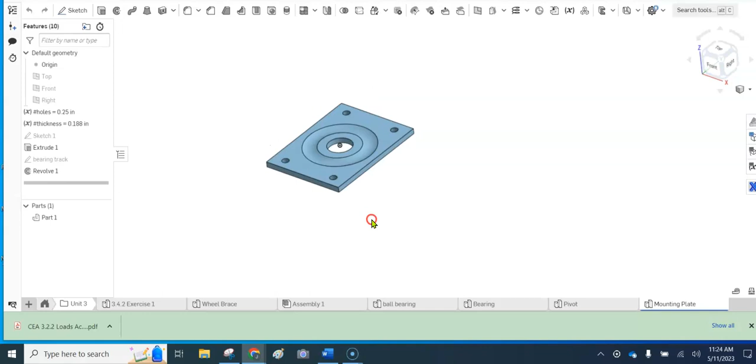Taking a look here, I've got a rectangular prism with a hole, 5 holes, and this circular groove in it. Most of this is pretty straightforward.

I'm going to create a rectangle, we'll use our corner rectangle, 3 by 4.

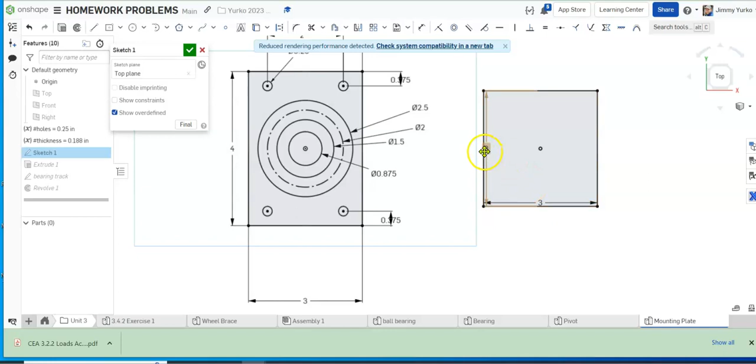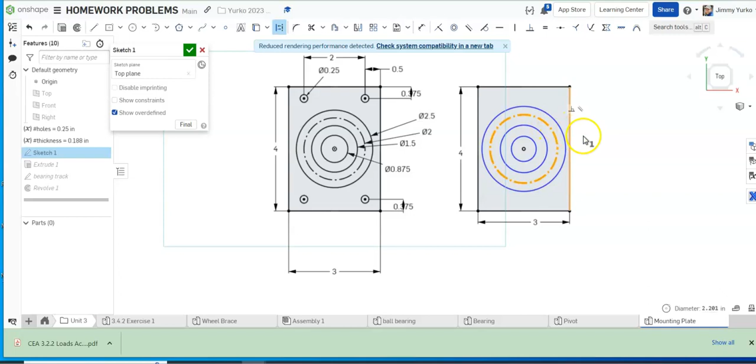And then we will create a couple of circles. It has 1, 2, 3, 4, with the third circle being a construction line. So the circle there is a construction line. Q on the keyboard gets you the shortcut to construction lines.

The circles are 0.875, 1.5 inches in diameter, 2 inches - that number is going to be useful later - and the last one is 2.5. Okay, we have 4 circles.

They are on the outside. Get those to line up. Make sure those center points line up with each other. We get this last one - I'll make sure that it lines up with both circle 1 and circle 3.

And then we'll set them all to be the same size. The dimension of those was 1/4 inch.

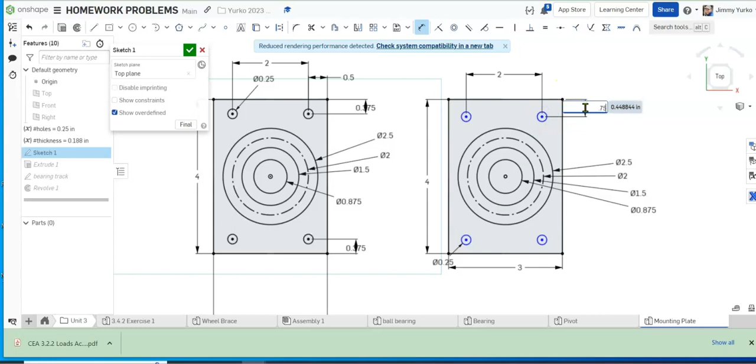Okay, they're 2 inches apart in this direction, 3/4 of an inch from each end, and a 1/2 inch from the side. Do your best to get those dimensions nice and neat.

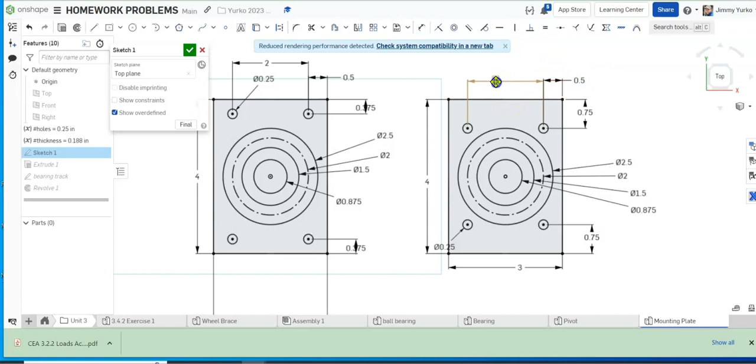Once you have all that sketched out, ready to go, it's time for extrusion. Turn the sketch back on. Make sure to include everything but the center. There we go.

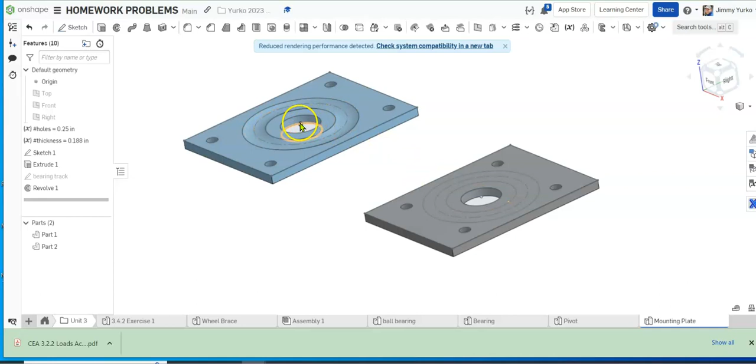Now I have my sketch turned back on, and we're going to go ahead and create this groove here. To do that, I need a plane. Now, if you created this from the origin like I did on my original, you're not going to need to create a separate plane - you just use the right plane. But I didn't, I'm duplicating this, so you have to create a plane.

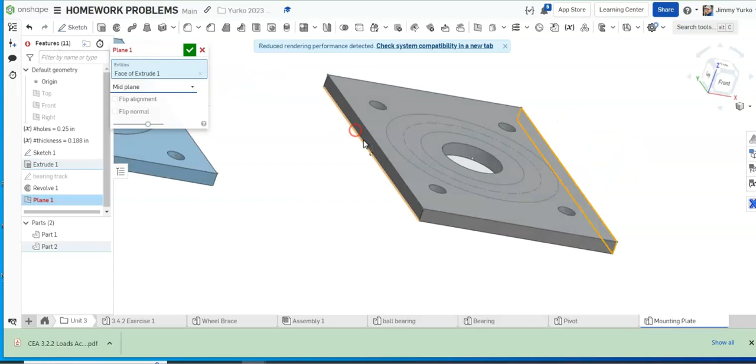Offset, actually mid-plane. Let's use mid-plane, so we use that plane and that plane. That creates a plane in the middle between those two faces. And so I'm going to hide my first part so it's out of my way.

And we're going to go ahead and add a sketch to that plane. Okay, again, if you did this from the origin, you don't need to create the plane, you just create the sketch on your right plane.

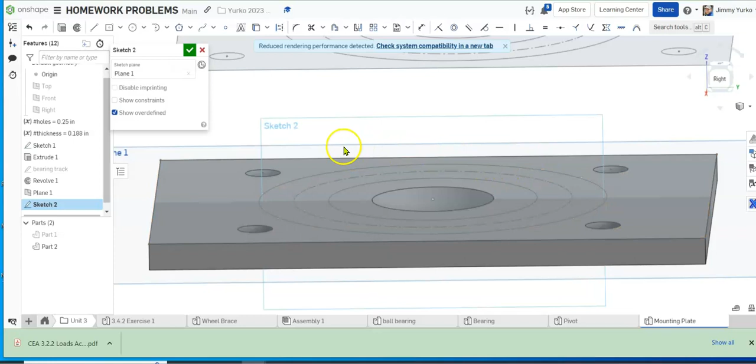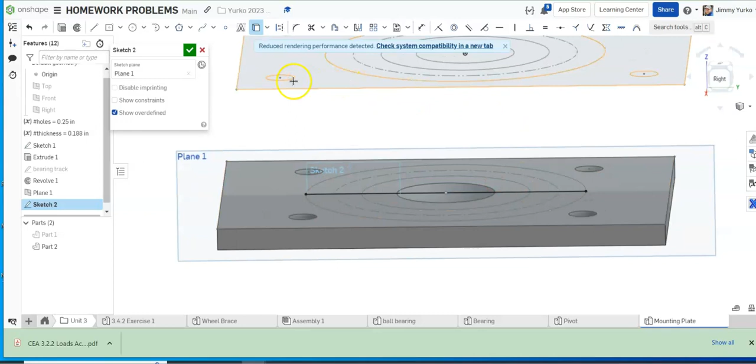Now I'm going to go ahead and add some points. Coincident, I'll try to use that line. Let's see if I can get a point here. That's not going to work for me. So let's go back to my visual sketch.

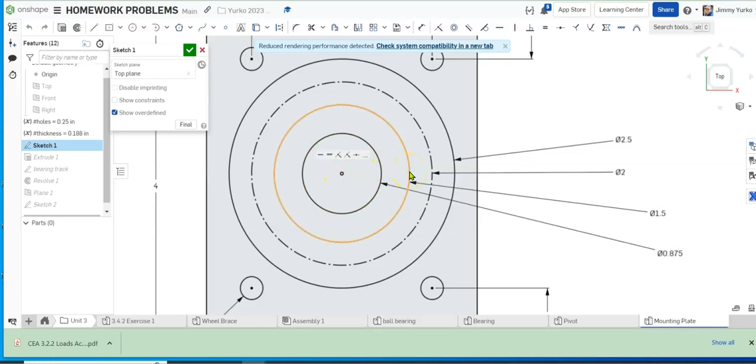I've got that circle, so it's a 1 inch. So the distance from center to the first part of the groove is 1.5, and the outer part of the groove is 2.5. So we're going radius - from center to here is going to be 3/4, and from here to here will be 1 1/4. Let's go back into that sketch from before.

So this point will be along that line, 3/4 of an inch in.

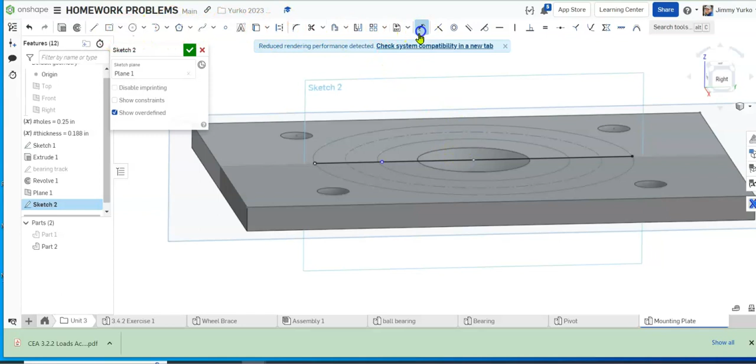Okay, I'm going to need a vertical line to serve as a revolution point from here vertically. That's just going to be a construction line, so I'm going to click that construction line. Now we're going to hide that part for the moment.

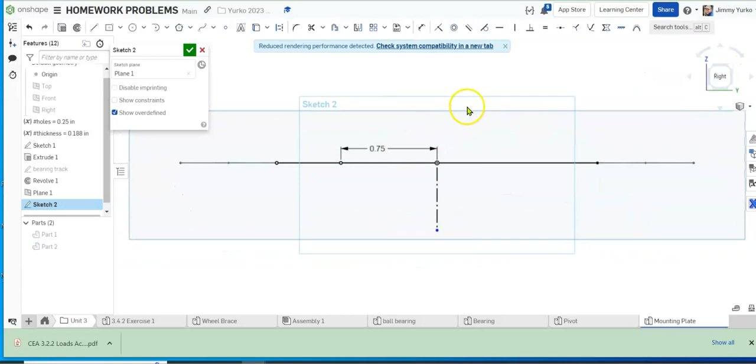So the profile of this dish is semicircular. Using the 3-point arc, I know that it starts here, ends there. Now all I need is a radius, and I believe the radius was 0.5.

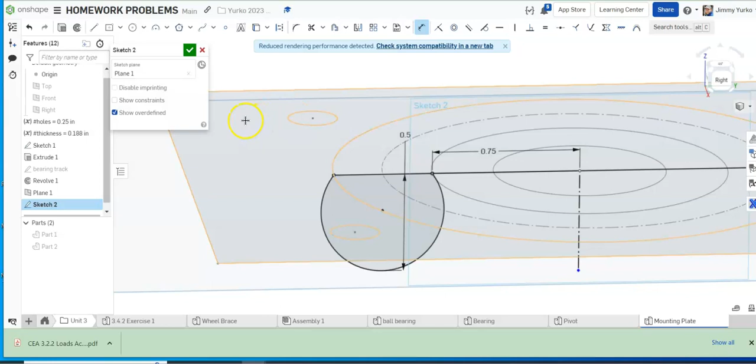No, that wasn't right. Let me go back to the sketch - we'll save that for a second. Go back to bearing track sketch. It was a 1/2 inch across. Yeah, radius of 0.5.

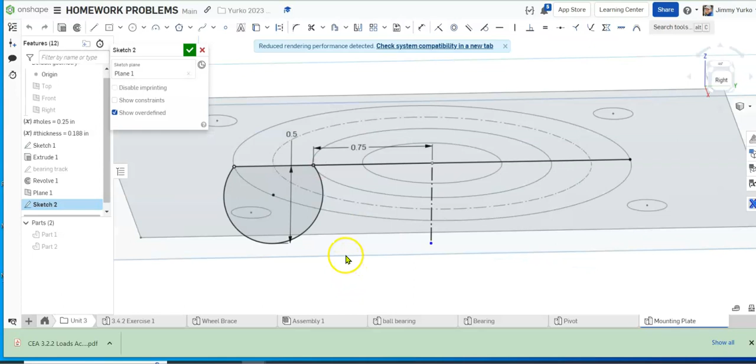So let's see what I did wrong. Oh, move that above - that needs to be up here with a radius of 0.5. There we go. So there you have it, there's my bearing track.

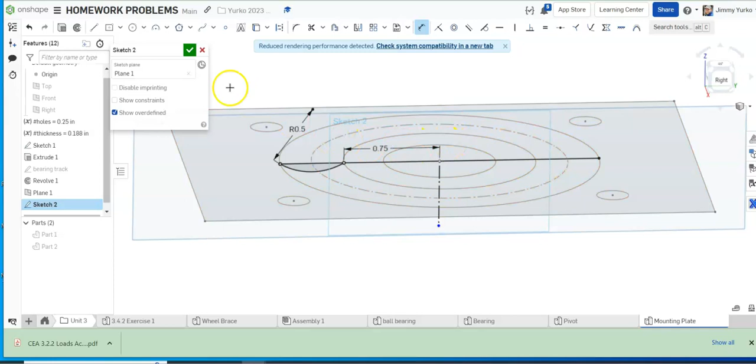And what we're going to do, we'll turn that back on. We're going to revolve this profile around this axis, which will give us the bearing track. Of course, we'll do it as a cutout. So turn that back on, hit the revolve button.

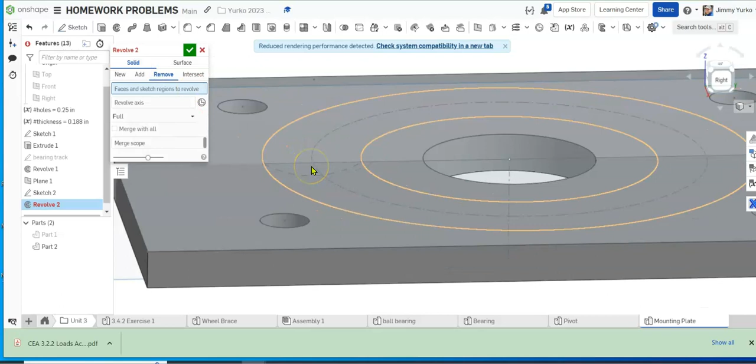And we will remove - and it's going to be tricky to find that, so I'm actually going to hide that for a second. We'll turn that profile, that axis - it's a remove. Turn it back on. And there it is. So you have to toggle this on and off, and that's probably the trickiest part.